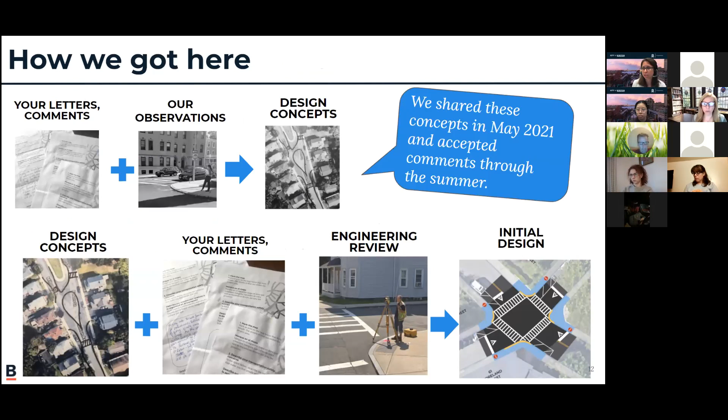So your letters and comments and our observations informed some design concepts that we shared back in May. We took comments on those throughout the summer. And since then, we have also gathered additional engineering data to understand what is underneath our streets, where the utilities are located, and better refine those concepts into initial designs, which we'll share tonight.

So first, I'm going to talk about things that you're going to see throughout the zone. At all entrances, everywhere that drivers can come into your neighborhood, we'll be adding 20-mile-per-hour signs and supplemental 20-mile-per-hour pavement markings.

We're also going to be adding speed humps on almost every street in the zone. Speed humps are usually spaced between 150 and 250 feet apart. They are not in front of driveways, and they have no impact on parking.

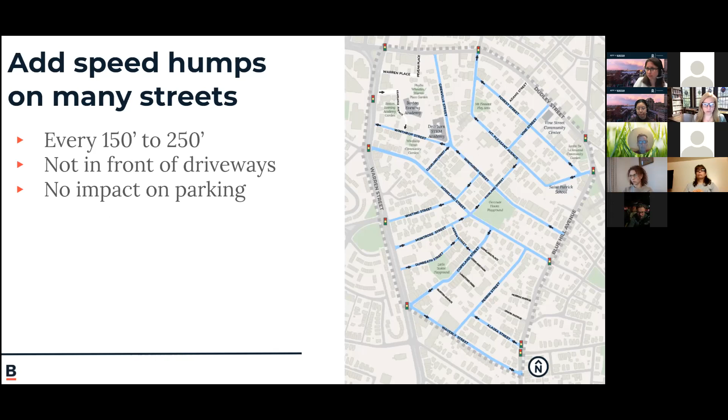Speed humps are about 12 feet long, and they're a gradual taper up and down. Speed bumps are abrupt, and you'll probably see them more in parking lots. We're not building that type. What we're building is something that feels comfortable to drive on at about 20 miles per hour.

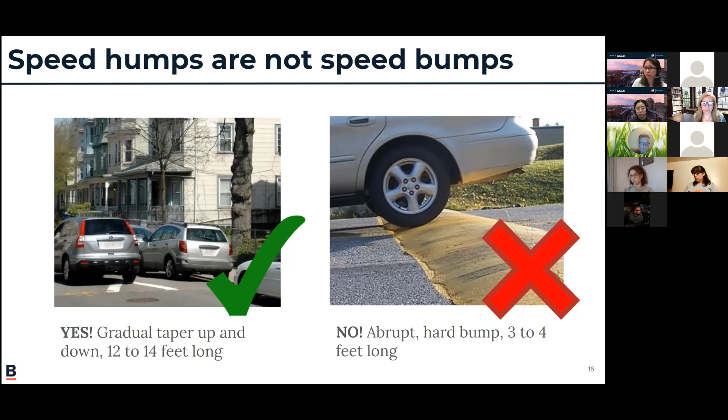When we plan for speed humps, there are three main considerations that we think about. First is hills. We cannot put speed humps on streets that are too steep. Second are curved streets. So we can't put speed humps on or too close to curves because drivers won't have enough advanced visibility to see them.

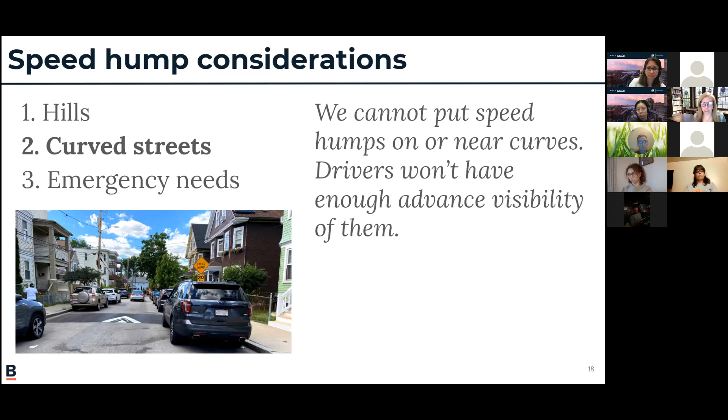We also consider emergency needs. So we have guidance from emergency responders to plan how many speed humps we can put on any route. We're trying to balance everyday safety on your streets, having drivers go slow, with ensuring that in an emergency, the response times aren't extended too long.

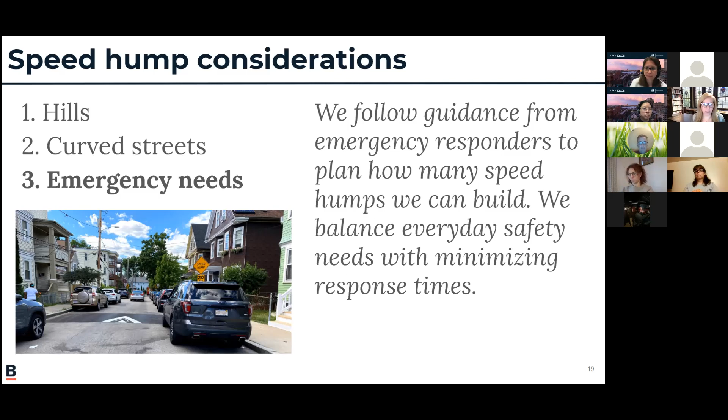So this map is small. I'm going to show it larger in a moment. All of the streets that are in blue are streets that we're considering for speed humps. Streets that are white or gray will not have speed humps as part of this program.

We don't know exactly where all of the speed humps will go right now. We will be able to come back with those details. There may also be street segments that we find we can't put speed humps on because there might be too many driveways or the street might be a little bit too short.

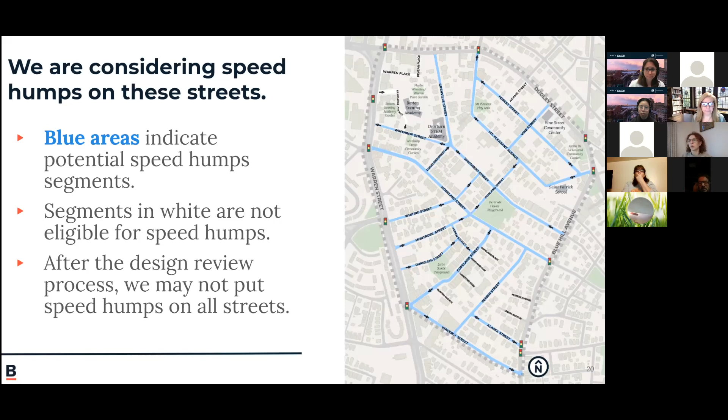So the northern half of the zone, I'm showing all of the streets that are possible for speed humps. For folks on the phone, this includes Forest Street, Vine Street, Mount Pleasant Avenue, Winthrop Street, Greenville Street, Cleveland Street, Fairland Street, Moreland Street, and Montrose Street.

Switching to the southern half of the zone, showing you all of the streets that are eligible for speed humps. This includes Moreland Street, Whiting Street, Montrose Street, Aspen Street, Dunreath Street, Copeland Street, Perrin Street, Alaska Street, and Waverly Street.

So you're more likely to find speed humps on streets in your zone than streets without speed humps. And these will be online so you can spend more time looking at them.

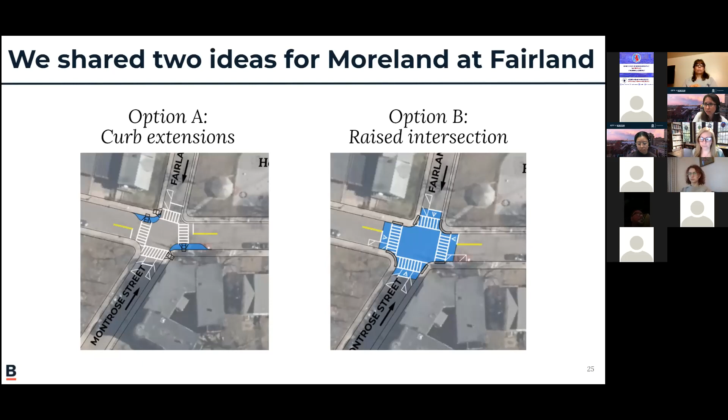Last time we talked with you in the spring, we gave you two options for Moreland at Fairland: adding curb extensions, or doing a raised intersection where all the crosswalks are at sidewalk level. Based on your feedback and our engineering review, we determined that a raised intersection is the direction we're going to go here. This is what that would look like.

Coming from all directions, you'll have a stop line and a stop sign, so drivers will have to stop before the intersection. There will be an area where you go up about 6 inches to sidewalk height to travel through and down, elevating the crosswalk. There are no ramps to go down and across and back up, it's all flat, even surface, so you'll be up a bit higher for drivers to see you. It will also slow people down and reinforce that as a driver, you need to be on the lookout for people crossing the street.

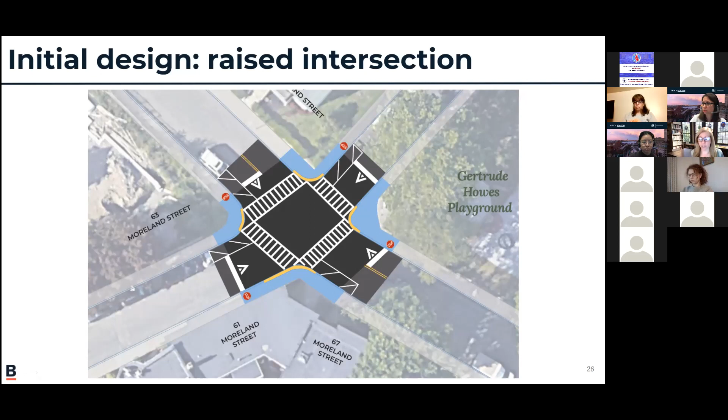Just down the street at Copeland, we also gave you two options: a raised crosswalk with a curb extension, or a fully raised intersection. Again, based on your feedback, we're going to go with a fully raised intersection here.

We're looking at changing these curbs a bit so that as you're approaching as a pedestrian, you can go in any direction. We'll have all of this raised up to sidewalk level, and as a driver you'll have to slow down to come over it. You'll also be better able to see pedestrians, and drivers turning down Copeland Street will also be going much slower because they'll have to go up and back down to turn.

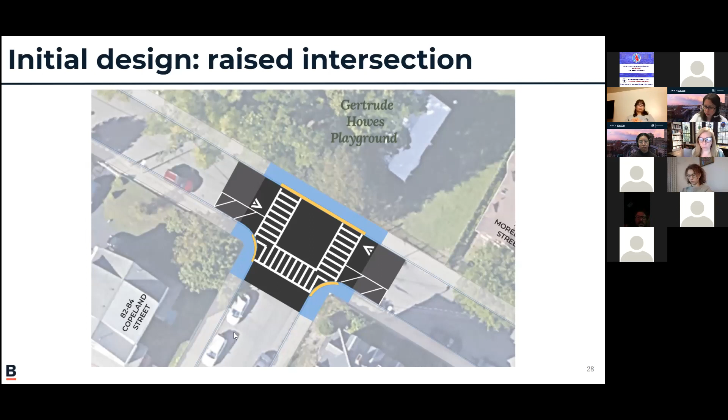There will also be speed humps elsewhere on Moreland and Copeland to keep those speeds low. I want to make sure we're all on the same page: wherever we're doing crosswalk improvements, it comes with more parking restrictions. This makes it so you can have the crosswalk, and you can't park on the crosswalk itself. We also restrict some space as you're approaching the crosswalk so drivers coming down the street are better able to see pedestrians, especially short pedestrians, youth, people in wheelchairs, and people like me who are just shorter in general. So there is some parking impact as a result, and I want to be very clear that's a trade-off we as a city are willing to make to improve safety for pedestrians.

At Fairland and Moreland, we're looking at about 4 parking spaces affected: one here, a couple here, one here, and one here. At Copeland, we would be restricting parking in this area and this area on each side of the raised intersections, that's about 2 parking spaces.

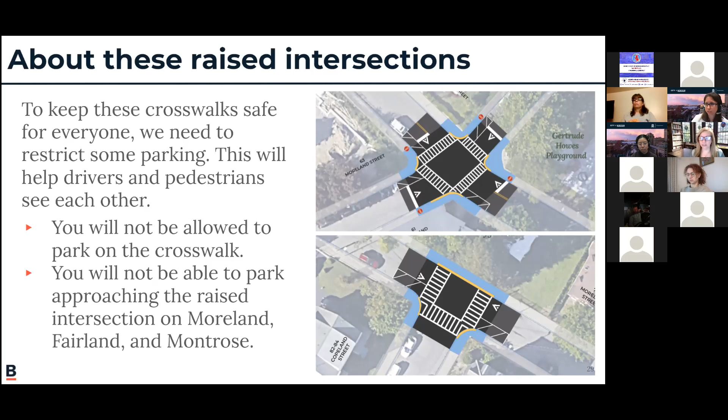So moving down Copeland Street, we're looking at this location because there's also a park.

You can't see people who are trying to get to the park. It's not even really a crosswalk to get you to the park. And there's a bend in the street that makes it hard to see what's coming up.

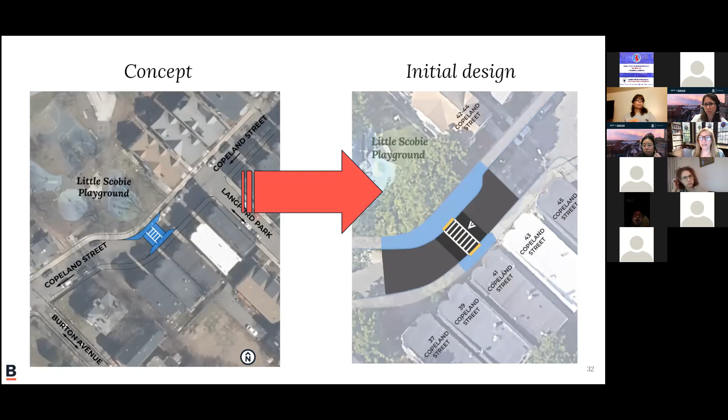So last time we came to you with the concept on the left, which featured curb extensions and a raised crosswalk. Following our engineering analysis, we've changed it a little bit.

We can't add a curb extension on the other side of the street because of where the utilities are underground.

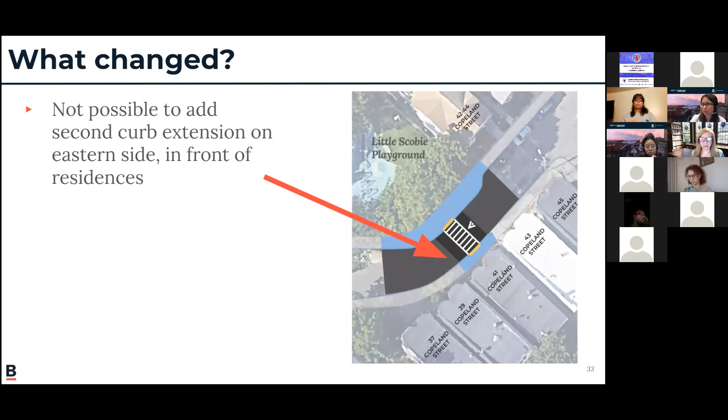Again, because this is a new crosswalk, it means that we're going to have to restrict parking where it used to be. So you won't be able to park on the crosswalk, and you also won't be able to park on the approaches to the crosswalk. This improves visibility and makes this a nice, safe crossing.

So we'll be restricting parking from about here through this curve. And there's a driveway right here already. We may be able to keep the parking spot here, but not right here on the crosswalk itself.

And yes, by law, you're not allowed to park on a crosswalk. By city rules and regulations from the transportation department, you're not supposed to park within 20 feet of an intersection.

But again, because we're adding new crosswalks, it is changing how people are able to park. So it's not just enforcing an existing rule, we are adding new restrictions.

So again, we will be restricting some parking spaces here. It'll be between 5 and 6, but we'll be able to work that out.

And I know that in a lot of neighborhoods, the goal is to try to minimize as much parking loss as possible. We're going to try to do that. But again, our position is that pedestrian safety has to come first. And we're really excited about making these crosswalk improvements happen.

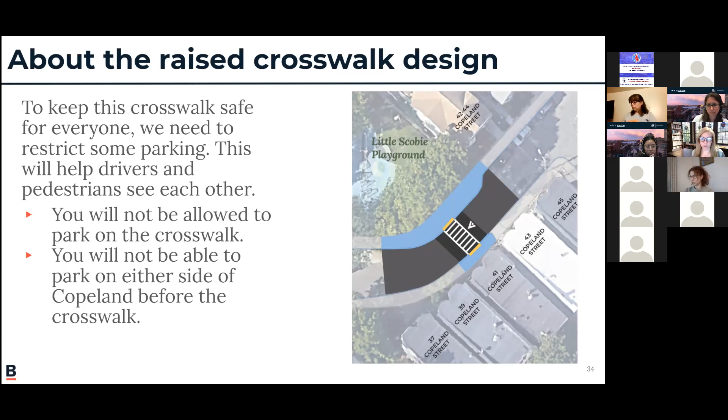All right, the third focus area that we talked about last time is on Mount Pleasant Avenue. So we're focusing at the second bend of Mount Pleasant Avenue because there is another park. There's no crosswalk to that park.

We've heard that you can't see people when they're crossing the street. You definitely can't see them when they're crossing to the park. The bend causes visibility issues, and people tend to speed up going around here.

So on the left is what we shared back in the spring, and on the right is our initial design.

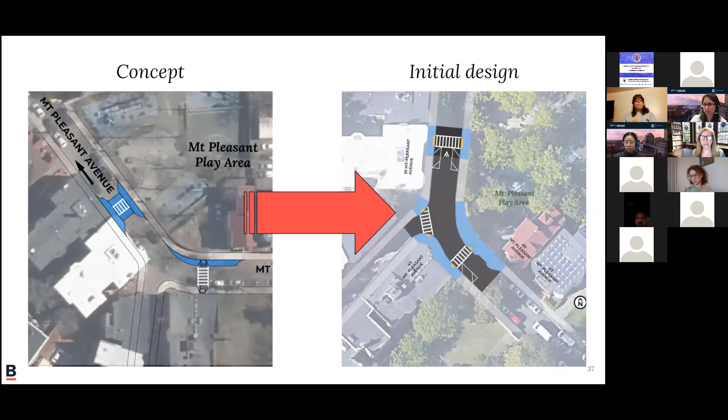So the things that have changed, again, because of where the utilities are underground, we can't add curb extensions for the new raised crosswalk at the park entrance.

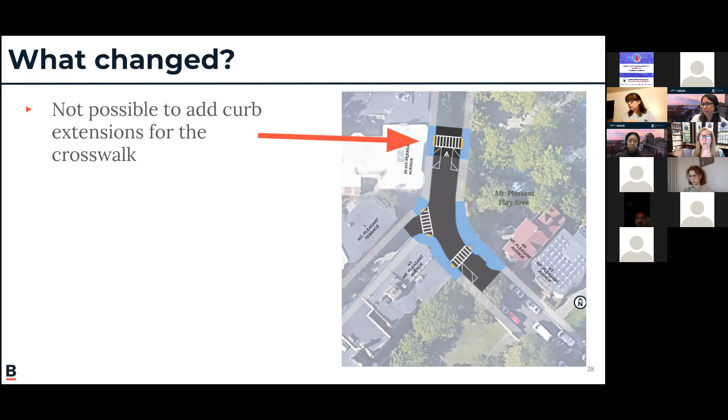We also will be rebuilding the curb ramps over Mount Pleasant Terrace because they're not accessible, or they don't meet the guidance. And we'll also be able to add the crosswalk that should be right there.

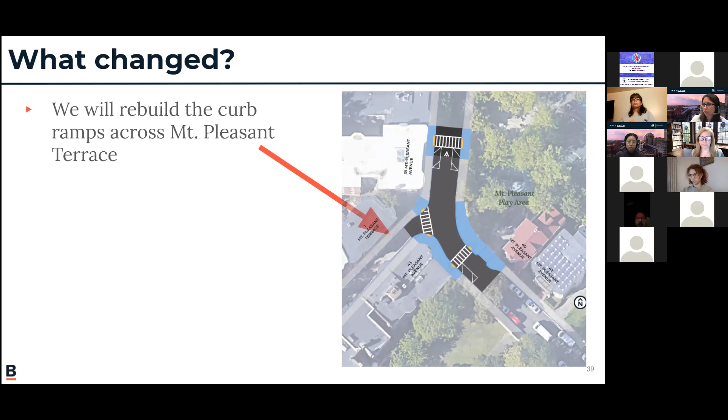Like the other crosswalk improvements, this also has some impacts on parking. The crosswalks over Mount Pleasant Avenue are new crosswalks. You won't be able to park on top of them.

We also will be restricting some parking in advance of those crosswalks to improve visibility of people who are crossing the street.

In total, we're expecting about 4 parking spaces lost because of the raised intersection, 2 for the crosswalk and 2 in front of it.

And then for the new crosswalk down here, we're also expecting to lose a couple of spaces. There is no parking along the curve already, but we would restrict parking just in front of the new crosswalk here.

So it's maybe 2 to 3, especially if people pack a little closer, it's more like 3.

There are no stop signs here because there are no conflicting traffic movements. So stop signs are meant to control who gets to go at an intersection.

So we're aiming for the raised crosswalk, the curb extension, and the series of speed humps that will be on this street to bring people to safer speeds.

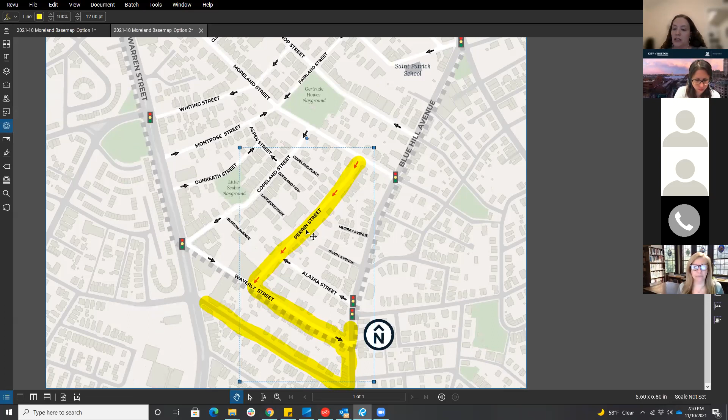So those are just some options. Obviously there are other routes or paths one could take, but we just wanted to walk through the most obvious ones that appeared to us.

That essentially means everybody would have to exit through just this one street. And if you've ever driven on it during rush hour, like traffic in the afternoon or morning, because there's no light on Blue Hill, lines are typically several cars deep on Waverly. So I think generally this would probably mess up traffic a lot, especially with the added apartments.

And then there was a community meeting a while ago talking about adding more affordable housing on Waverly Street specifically. So it just seems like there would be only one way to exit the neighborhood. But just my two cents.

Yeah, thank you, that's helpful. Sorry, just to clarify, Alicia, you mean there's only one way to exit because you wouldn't be able to take Perrin up to Moreland? Right, so when you exit out of Perrin, you could take Moreland left or right, essentially.

And if you take it left to Blue Hill, you have a light, so even though there's typically traffic during rush hour, you're covered by a light. When you try to make that left or right on Waverly onto Blue Hill, especially around 3-4 p.m., you just really can't. So I think the only way that would work is if you add a light at that intersection.

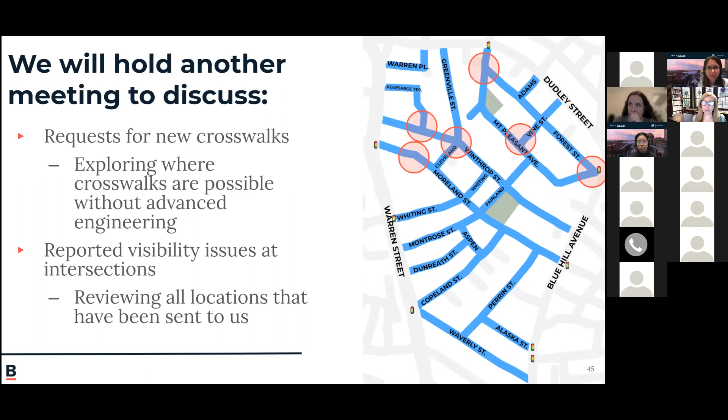Again, we're at the point in our design process where we can still make changes. We're not locked into exactly what we presented tonight. As I mentioned, there are a bunch of other things we're still working on to bring back to you, so be sure to stay in touch with us. We have virtual office hours where you can join us in a virtual meeting or by phone to talk one-on-one about what's happening and give us your thoughts and feedback. You can also get in touch by email, phone, or regular mail. We also really hope you'll share this with your neighbors. We do send mailings to all the addresses, but I know for me it's also very easy to overlook stuff that comes in the mail, so please talk to your neighbors about this program and where they can get more information.

So right now we're in the engineering study phase of our project, reviewing the types of changes we've made since we talked to you last year. We're still going through all of your comments to figure out what we're able to address well through this program. We can't solve everything, but we'll do our best to make things safer. We'll be coming back with another meeting, then working through finalizing our plans with hopes of handing them off to our Public Works Department for construction late summer 2022. That doesn't mean they'll be able to do everything next year, but they may be able to at least get started on some of the elements of this.

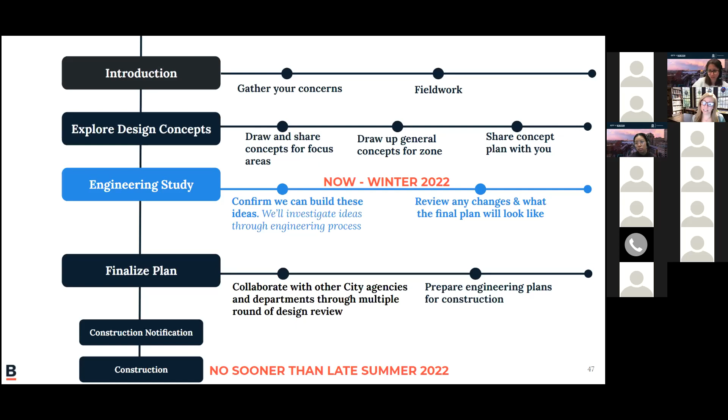We will be in touch frequently. You can always reach out at any time to talk with us. I've put up on the screen our website, the link to make an appointment with us, our email address and our mailing address. Please get in touch. I think Hannah will probably drop those links in the chat so that you have them. Already did. So efficient, Hannah.

At this point, I think we're happy to take more questions, open for conversation, but it is 8 o'clock, so we don't want to keep everyone too late, but happy to stay around for anyone who wants us to. We can also go back to different slides if you want to see them again and take a closer look.

I know daylight savings time, it maybe feels even later than it is. It's been dark for hours. If you just want to go, feel free. Our feelings are not hurt, but we do want to stay if anyone has anything to share.

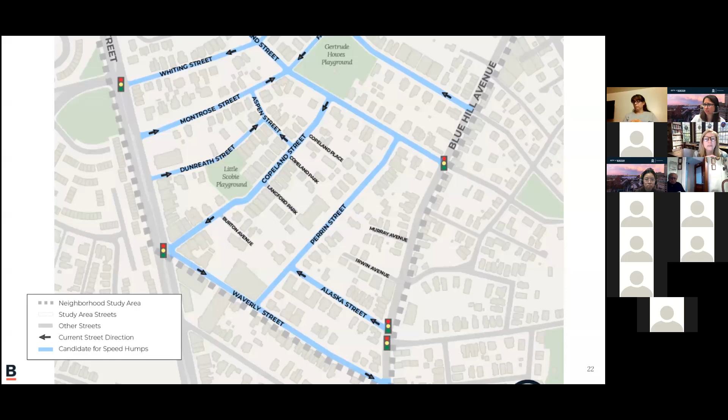Not only that, but during the day everybody uses Winthrop Street. If you're coming from Dudley and go up Greenville, you go straight ahead on Winthrop, and you can take a right onto Whiting and get right out to Warren. That's scary, because during the day cars are coming the opposite direction of the street, and if you're not careful, all of a sudden a car comes the other way and you jump because you're just not expecting it.

Whoever drives the wrong way naturally doesn't take their time doing it, they're speeding to try to get done as fast as they can. I don't know what can be done about that. The speed humps have to be done, but I don't know if speed humps are going to be able to help with the directional problem. I don't know what can be done about that, and it's a real problem.

I don't disagree with you. We've heard it from you and your neighbors a number of times about people going the wrong way on that block. So that is something we're still brainstorming potential solutions for, like what else can we do to discourage that from happening.

I don't want to be too down about it, and I don't know if we're going to be able to solve it fully, but I think at minimum we'll have the speed humps so they won't be able to just fly like they are right now. Hopefully we can figure out something to really discourage them from going that direction.